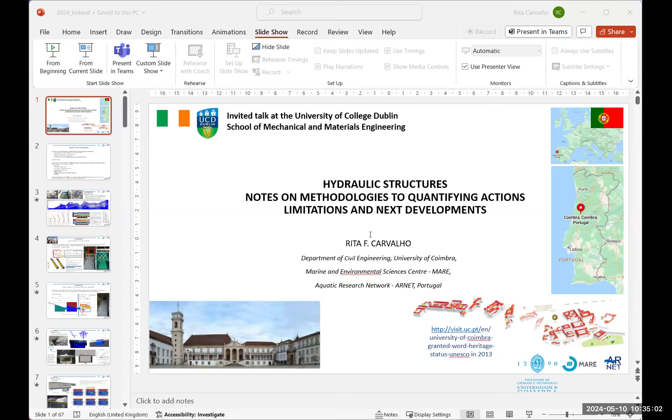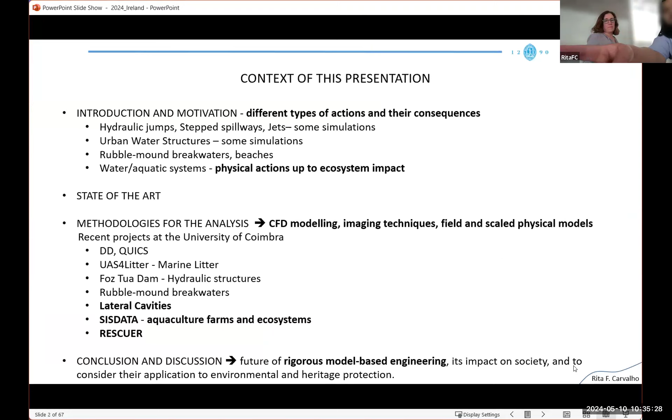Okay, so I will not do a standard presentation with introduction, state of the art, methodology and results, but I will give you... it's not moving on Zoom. The presentation is not moving on Zoom. I think we need to change the screen we are sharing. Yes, it comes now, but it's not in presentation mode. Okay, perhaps like this, probably. Change one slide. Yes, okay, and then we can put it to full screen. Perfect. Here, should be fine, this is perfect.

Okay, so I was saying I will give you a sense of what I've been doing since my PhD, more or less, and then I will mix a little bit of methodology with the projects I was involved in, just to justify the present projects and what we can do in the future.

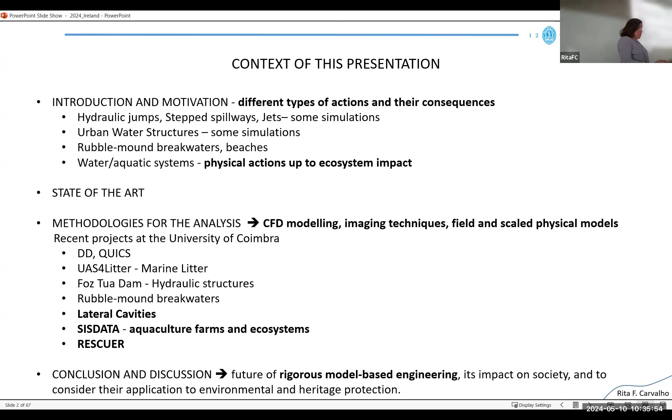So I start with hydraulic jump, which I think is the most interesting hydraulic phenomenon in the world. It's really important because it can have hydrodynamic pressure and cavitation at the bottom, and could even move slabs, very wide ones, at the bottom of the stilling basins.

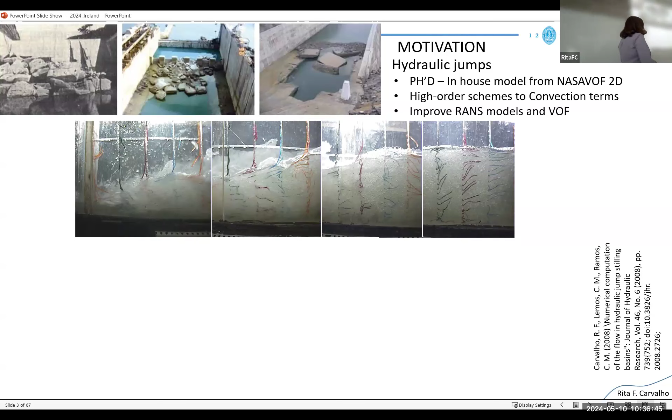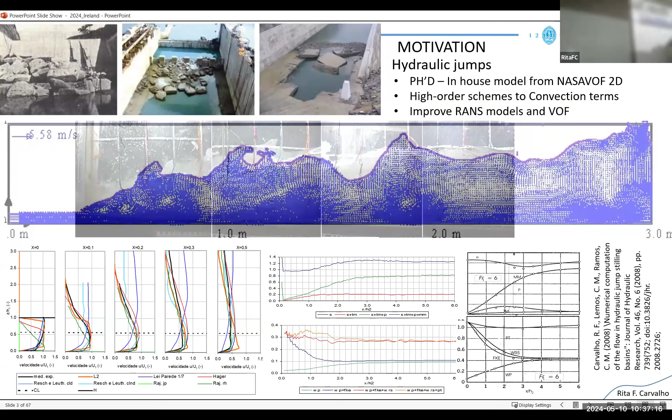So I started doing numerical simulation of hydraulic jump, also with experimental physics. At that time I used NASA VOF 2D, which was public from Los Alamos. I had to model all the high order schemes for velocity, and I could model the hydraulic jump in an apparently realistic way. But when I compared the results with the literature, and did some calculations along the hydraulic jump, the velocity wasn't very accurate, because we still had a lot of high velocity at the bottom, and also we didn't have the energy dissipation we were expecting in the models.

I also used this model for stepped spillways, but then Pedro, who was one of my first PhD students, wanted to go further in solving the hydraulic jump, and he tried to include a subgrid model for air entrainment in the stepped spillway. He noted that for narrow spillways we have like a 2D model, but when we enlarge the width, we have cross vortices along the width.

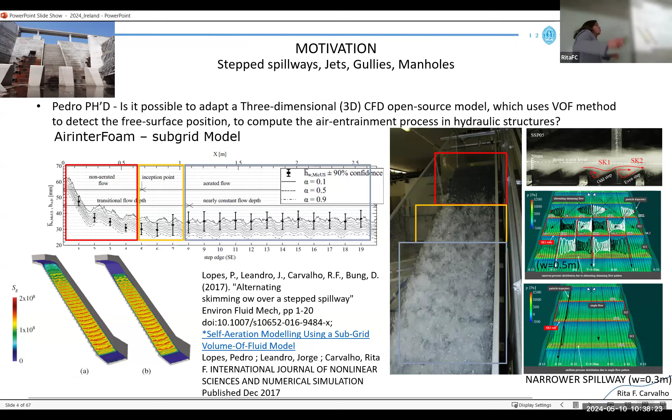With the air entrainment model implemented in OpenFOAM, AirinterFoam, we could get better results for the water depth, which is one of the important things to analyze for the walls of hydraulic structures.

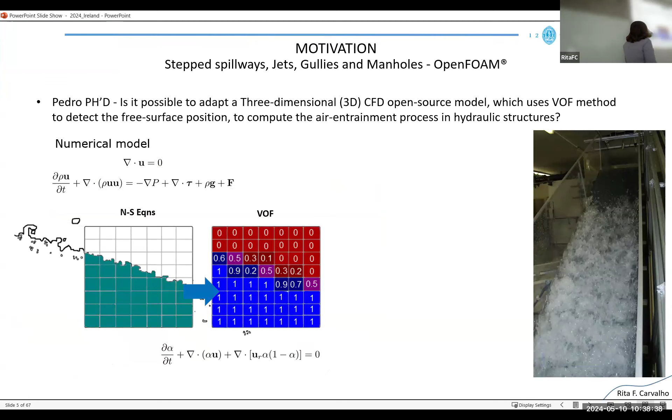So the model starts with the VOF model, and then we can analyze where the interface is with the VOF function. To include the subgrid model, we select just the interface, and then calculate a source term given by turbulence or velocity normal to the surface, and we could include some bubbles inside the model. We can couple it one-way or two-way, with some interaction between air and the model.

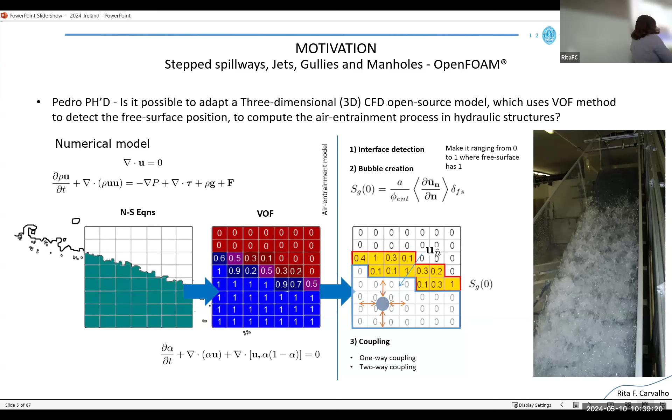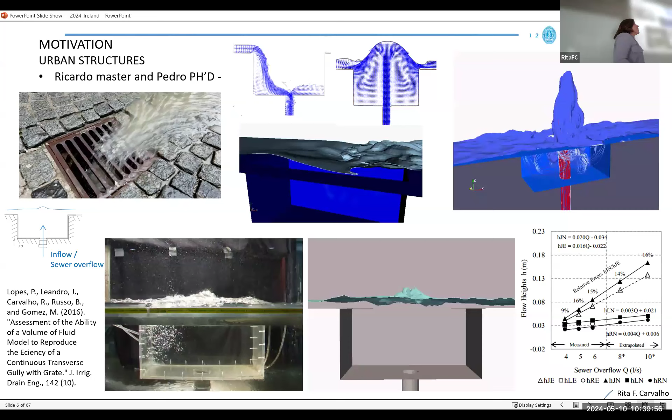We did some simulation in the gully. At that time it was much easier to get funding for urban structures, so we dedicated work to the gullies, and we could get some depth and some insight in the model. We also have something like a geyser effect when there's a lot of flow there.

As you noted, we didn't have bubbles inside initially, so we used interFoam to analyze the role of the bubbles inside, and we got good results as well in the gully.

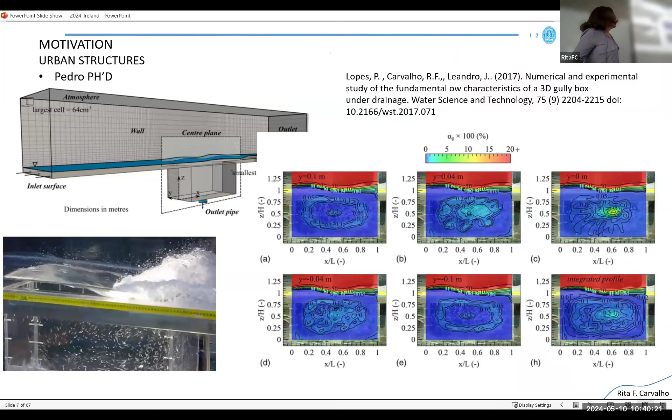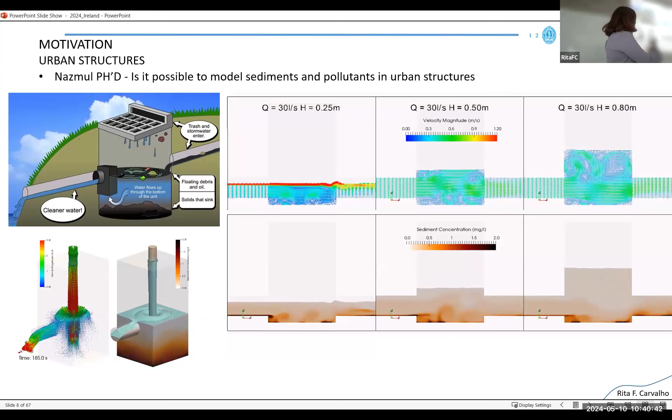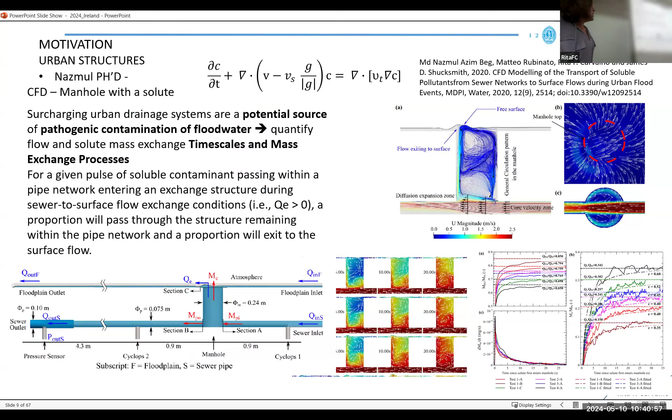Then we started to include sediments, like just a transport equation, and used some literature models to calculate the sediments in the manhole with the velocities at different water depths. We had to analyze some pollutants passing through the surface in the streets and also in the manhole, and we got quite good results.

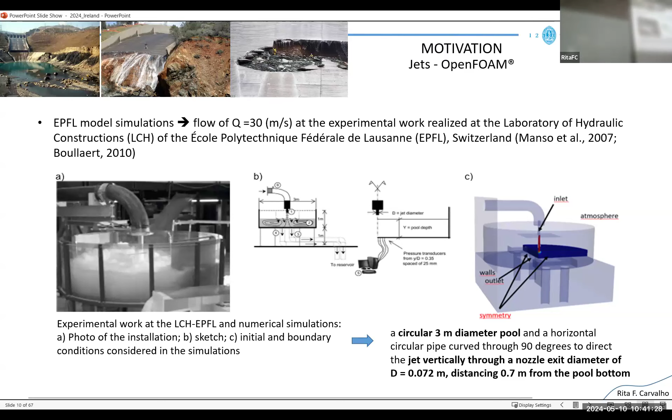So with the quarter we have a symmetry condition, so we use both subgrid model and multiphaseEulerFoam. Okay, this is just velocity. With this we distinguish here the water and the air. Most part of this velocity belongs to the air and not the water.

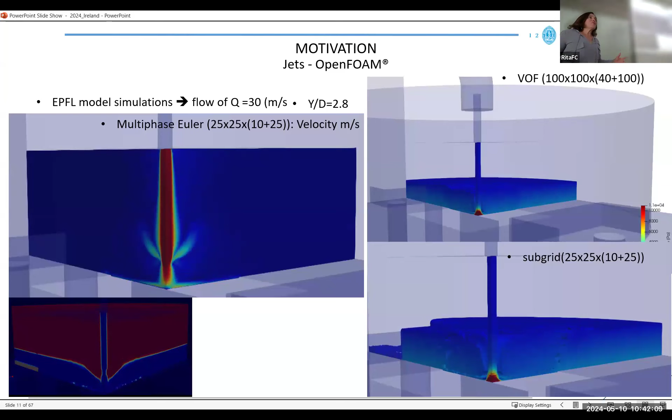multiphaseEulerFoam is taking too long to be solved, but it seems more realistic. But in the end, as we need too much time to have average and to have water depth, we can use VOF or subgrid that takes into account some air.

We analyze the steady state and we compare different models for the pressure on the bottom. We got good results from the fluctuation because we had turbulent kinetic energy according with the fluctuation, which is according to us. So turbulent kinetic energy is 16, so the square root is 4 meters per second, and it is according with the experimental in EPFL.

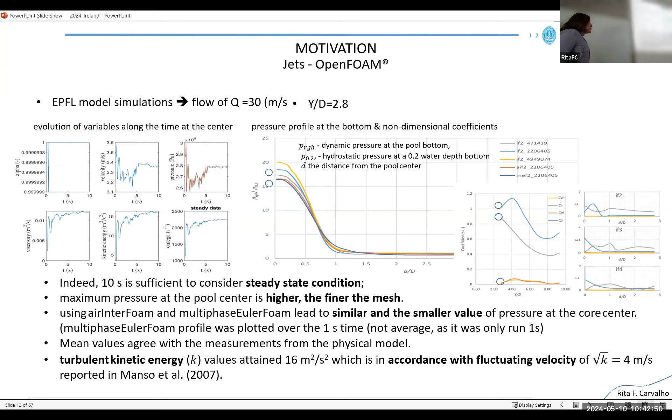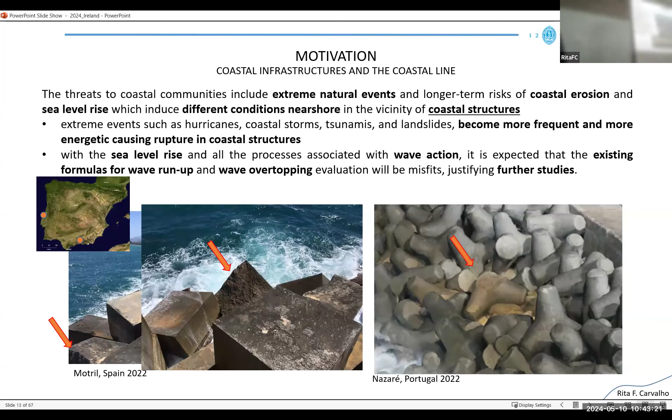Now we are analyzing with drones the port of Sines, and we see there are some movements in the blocks, and we could compare these figures to characterize the movements in the blocks, and then we can use also to validate some models.

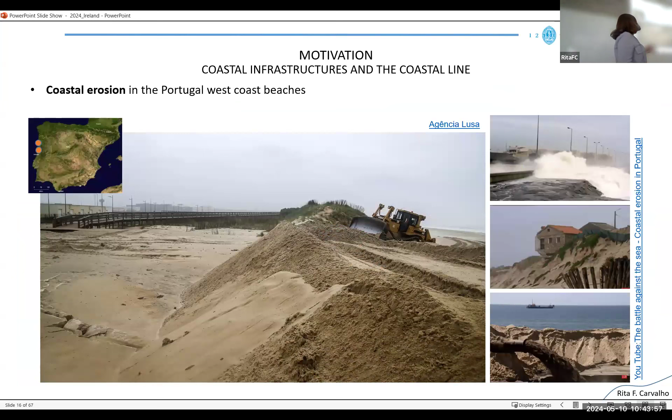We have a research center in Figueira da Foz, that is Mare Foz, and we can also have access to this breakwater. Of course, I'm worried also about the sediment, the erosion near the beaches, mainly in Figueira, that we have a problem that we have more accretion here and erosion here.

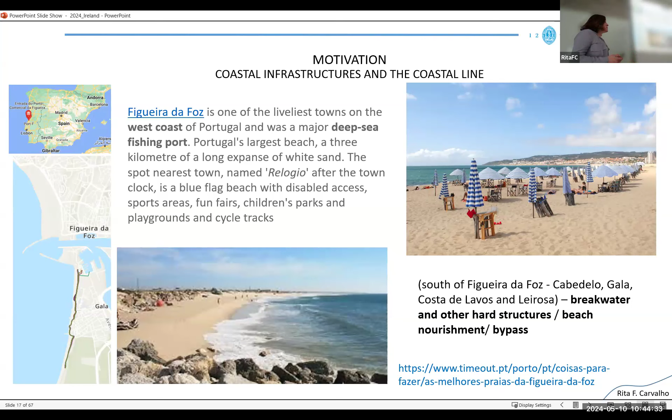And the prediction are to have these lines, and we are testing like some low sediment flow from this part, north part to the south part, but it's very expensive, so we are looking what is the best solution.

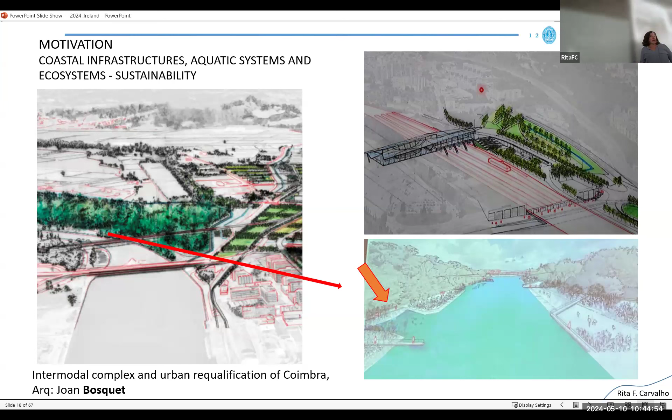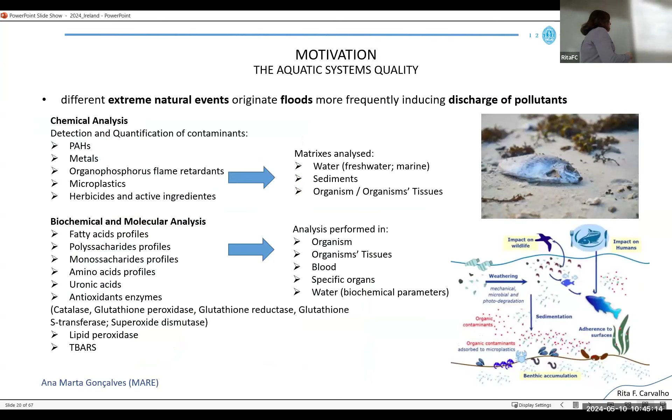And we work also in our research center with pollution and microplastics, and we see in Figueira that appears a lot of dust. And we also analyze a lot of things related with the aquatic system and the quality of the water.

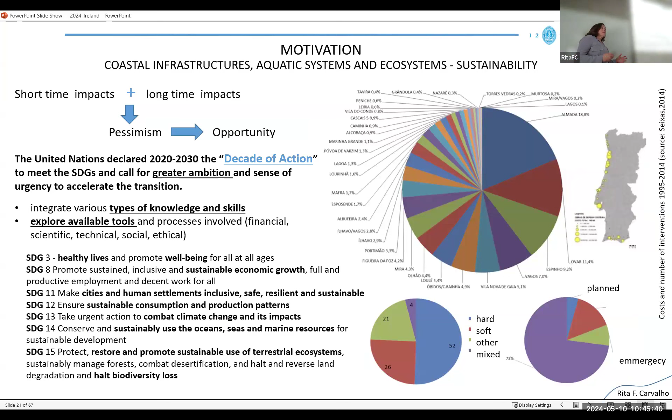So looking at the problems that hydraulics is involved in, we have a lot of problems, and we have to dedicate a lot of things related with the water. So my motivation is more and more related with fluid mechanics, to understand how the flow behaves with different hydraulic structures.

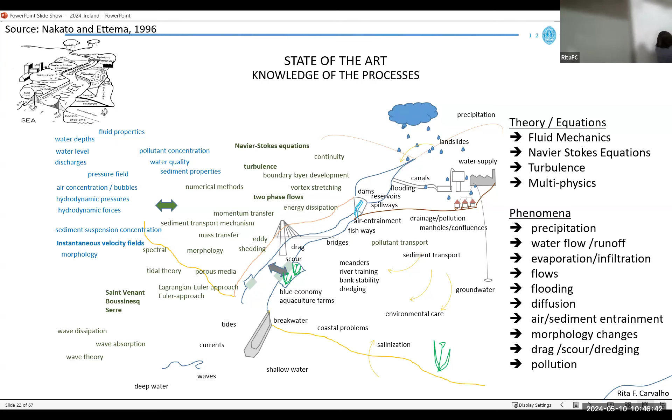This involves a lot of things, from rain to drainage to the urban part, some natural cavity, some interaction with vegetation, and so on. So I think that the picture tells that.

Focus on fluid mechanics, the water. If the velocity is great, when you have some geometry change, we have some movement in the water that creates some process.

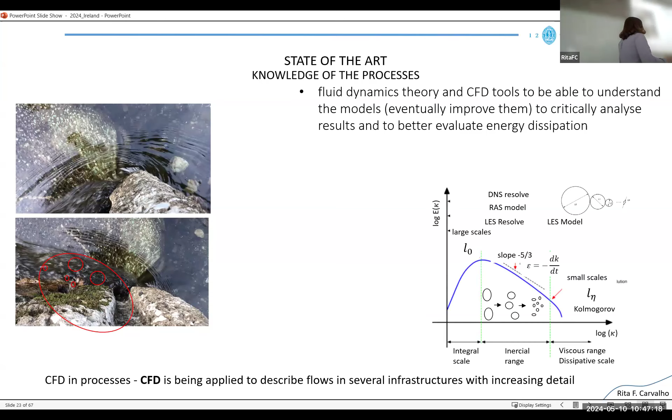We can understand turbulence nowadays with the energy cascade, that the energy is spreading from large scales to smaller and smaller, and have some dissipation.

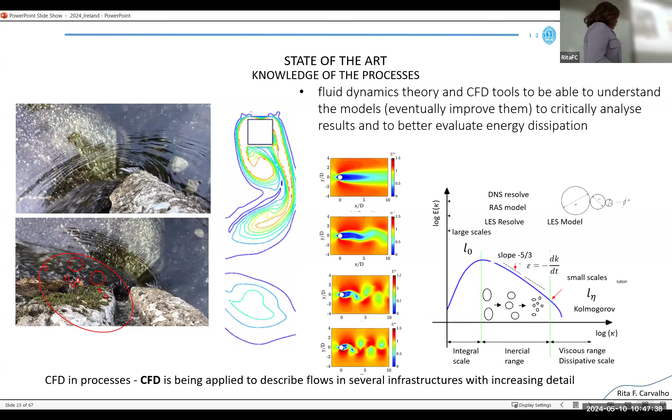And we also know that there are a lot of dynamics that are characterized by different Reynolds numbers, and we can now simulate and model and understand these particulars.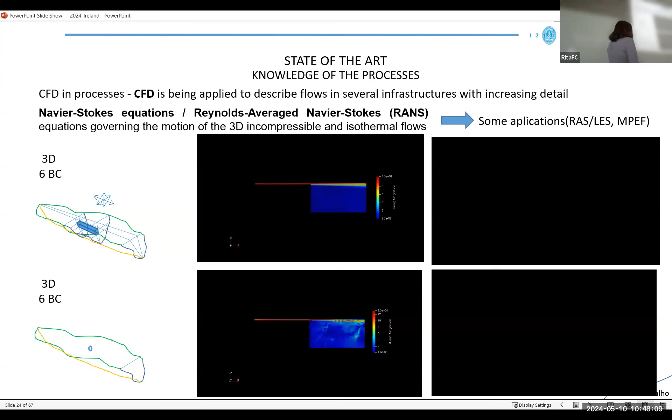The CFD we can apply with meshes thinner and thinner, and for this kind of mesh we can use large eddy simulation instead of RANS. Nowadays we see a lot of publications that say that it is large eddy simulation, but it is not real large eddy simulation, because for having large eddy simulation we need to have a very fine mesh.

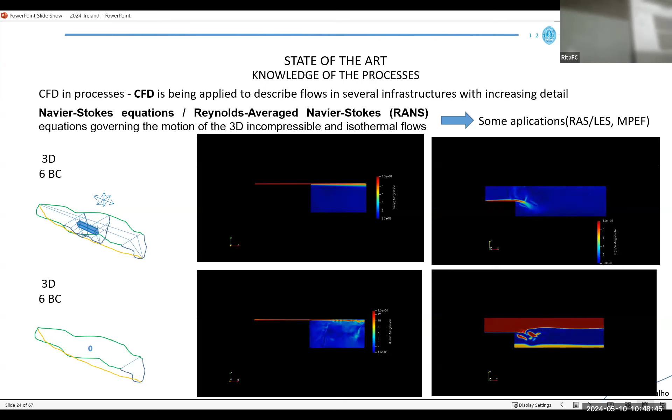Also we have multi-phase, that is the only model where we see some interaction with the air, and we can see this very easily when we have a wave break, that there is a spread in the air and in the flow. Okay, so here is the velocity, here is the different flow that I also include some sediment in the bottom to see some erosion.

So I'm motivated now to calculate the air entrainment and air-water interaction, and this is similar to waves and to jets.

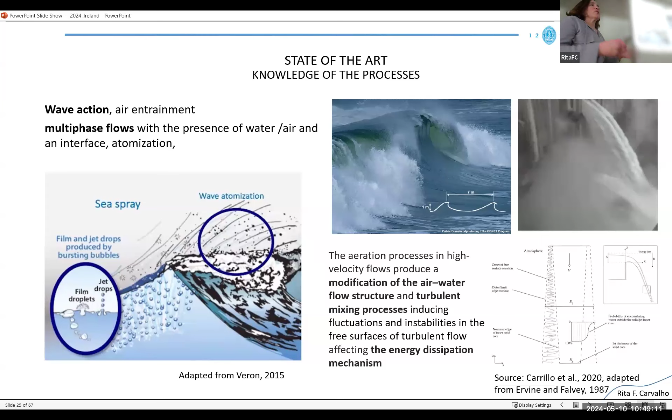We can identify from fluid dynamics the different types of air entrainment we have, and also the turbulence that could also provoke some structure movements, which is something I would like very much to study.

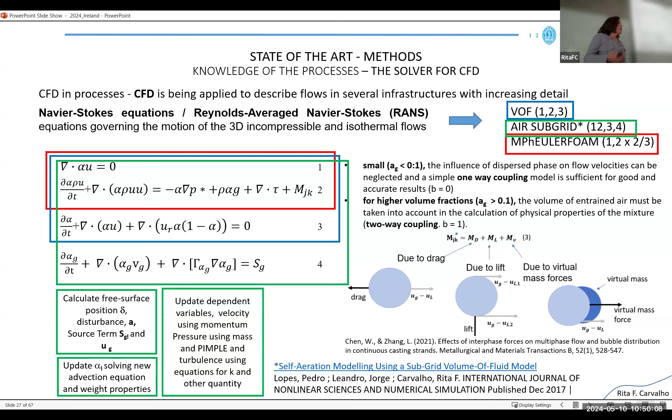About the air entrainment models, I presented the multi-phase EulerFoam, that is the Navier-Stokes equation for each flow. I also use the one-step Navier-Stokes for the whole fluid, like a mix between water and air, including just density and viscosity. We can also use the subgrid model, with an additional equation for the gas with a source term that could arise from excess turbulence or velocity normal to the surface.

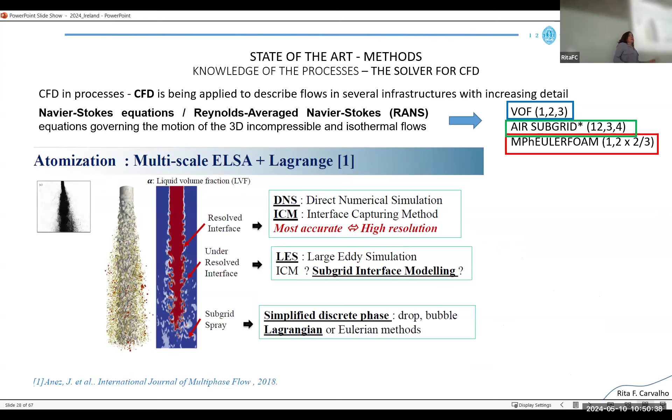There is also the ELSA model, which mixes with Lagrange, able to simulate some bubbles and interactions, some evaporation interaction between the water and air. So I'm moving now to Rouen, where they developed this model to analyze these kinds of problems. Let's move on to the methods, with some projects we did.

After finishing my PhD, we moved to a new lab, because now the university is divided between Polo 1, the old part, Polo 2, which is all engineers, and Polo 3, which is health science. And I had just the flow without energy.

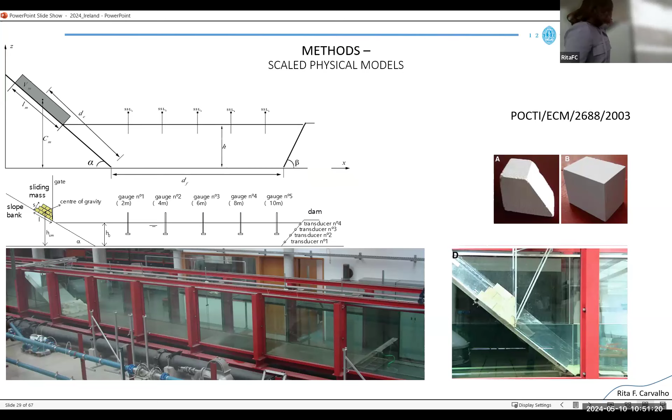So we took some models, some simulations about landslides. We didn't need any current, just water inside.

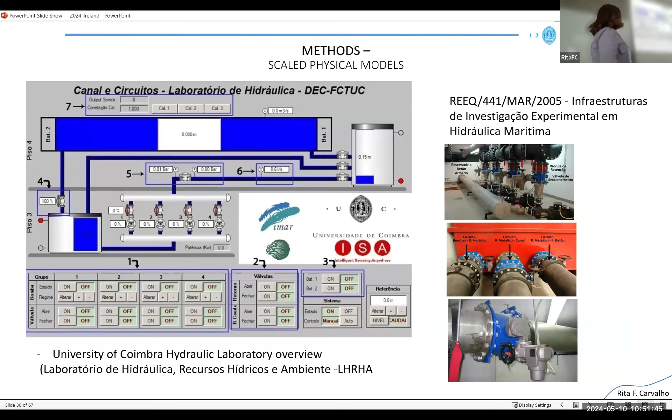Then we had a project to equip all of this, and I was in charge of doing a SCADA system, able to connect or switch on 2, 3, or 4 pumps, and control the flow between the reservoirs, the two reservoirs, and the channel.

We did a lot of tests, like some new equipment for producing energy, some hydraulic structures like channels with baffles, and we started to develop some image techniques.

This was in MATLAB. It was a master student who didn't like to study very much, but he liked photography and cameras a lot. So he did a Simulink setup doing video, and at the same time we could calculate the water depth instantaneously. It's kind of an easy task.

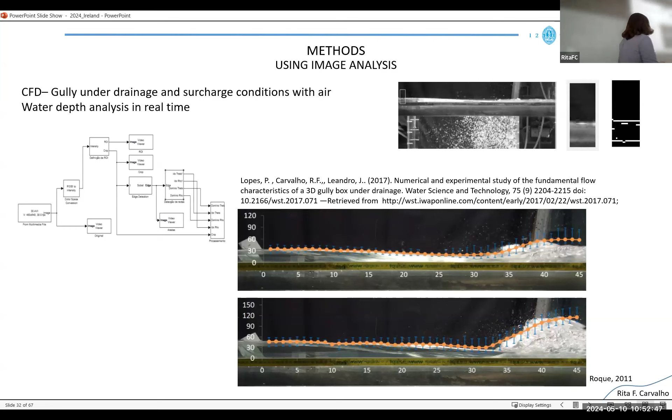We pass water and air, and then we can identify an edge, and then calculate the distance between two points. We improved this model recently with different bottoms in different channels, and also, motivated by imaging, we followed some techniques in MATLAB to analyze the movement of the blocks.

We collaborated with LNEC because they have large laboratories with big space for breakwaters, and we analyzed this with a simple technique like a matrix, subtracting each matrix. So we have a film, split it into several images, subtract each one, and then we can analyze where there are big slopes.

We detect the image before and after, and notice that one of these stones moves to here. So with this technique, we can localize in time, and then looking at the matrix, we can localize in space.

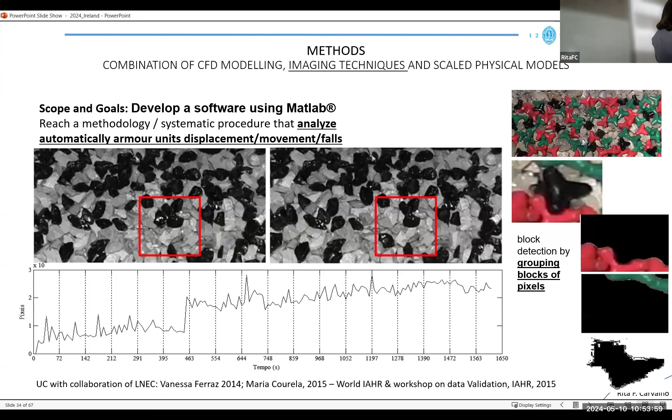Then if we want, we can spread different blocks with different colors, to have different groups and distinguish between them. We also can define the edges to better analyze the problem.

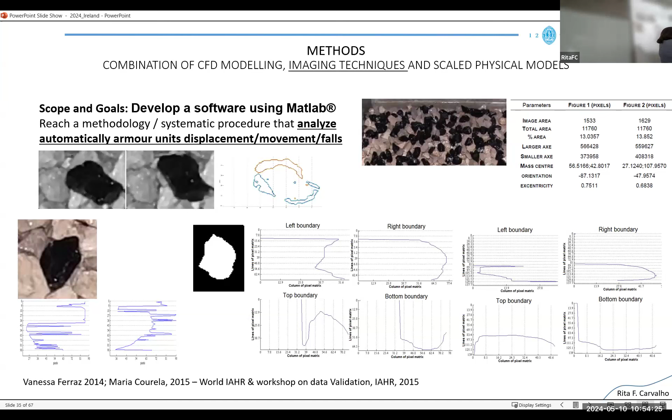We also detect some overall movement, because the stones were moving more or less together, but with some difference - we had a movement altogether with the blocks, so we could also analyze this.

For air entrainment, we also tried to find a relation between air and water. So we covered with black backgrounds, but then with water and air it was not very good. So we had to change this part to white to get the right relation between water and air.

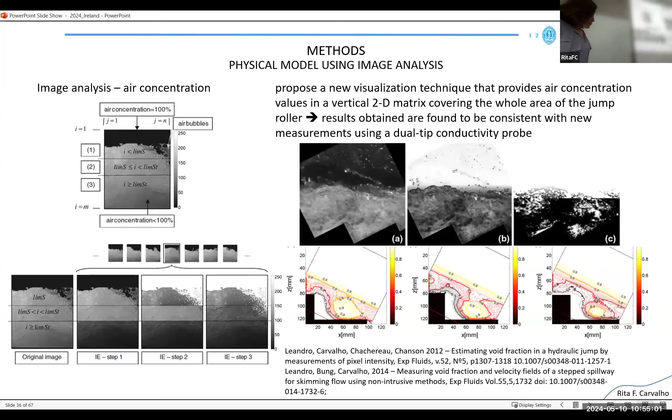We applied this to hydraulic jumps and to step spillways, and had some publications on that. And then with the project QUICS, we used PIV to compare with the CFD.

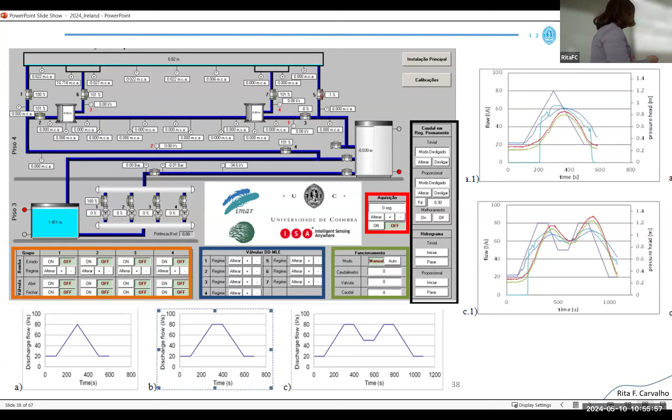With the projects related to urban structures, we could extend our installation to a dual drainage or multi-link model. We have a channel, a flume, with two gullies connected to two manholes, and we extend also the SCADA system. We developed some possibility to move the valves to have a water inflow, like a hydrograph, like a variable inlet in the installation.

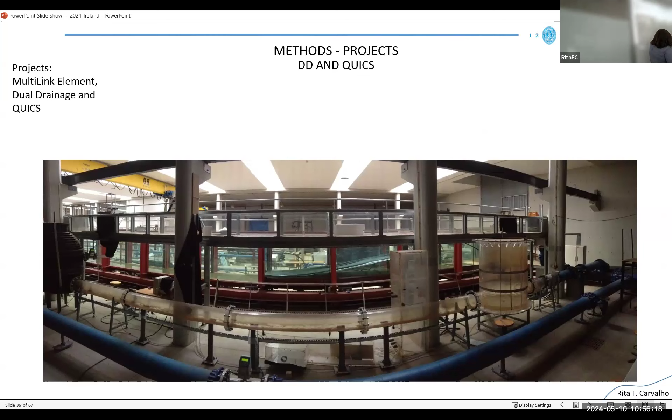So this is the installation. These are the manholes, which we made in acrylic to see the water inside, and we have that flume, and that's the pipe between manholes. We have a lot of pressure to analyze when we close the valve suddenly, and we can simulate this problem.

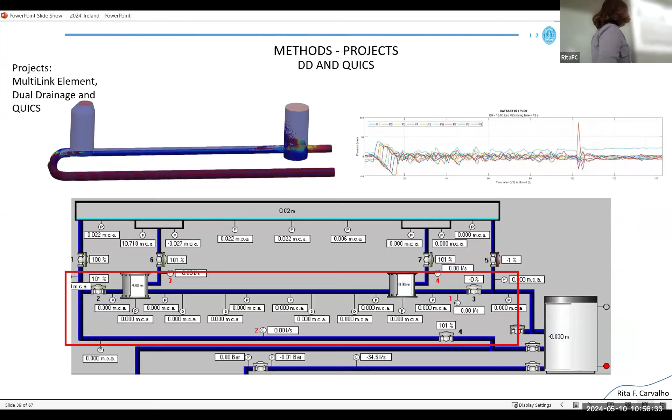The other project I was not involved in, but I was very interested in. It was to analyze with drones to identify different kinds of litter on the beach.

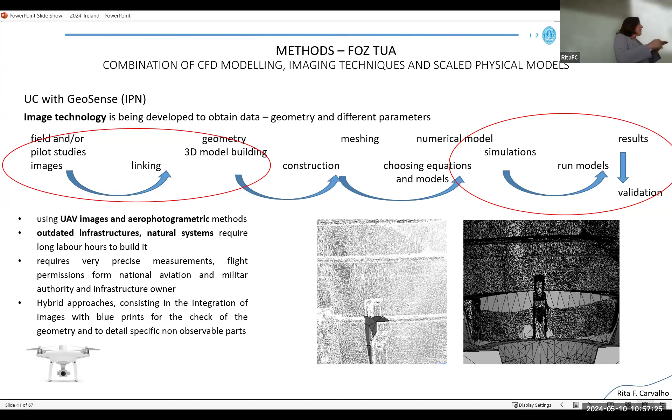This is the same technique we use also in hydraulic structures to have the correct geometry or to verify the geometry. With this project Foz Tua, we were allowed to measure in the stilling basin in the north of Portugal, but we didn't have the right geometry, so we used drones to calculate the surface. But the surface has a lot of irregularities and is not very good to use in numerical models because we have a very complex mesh.

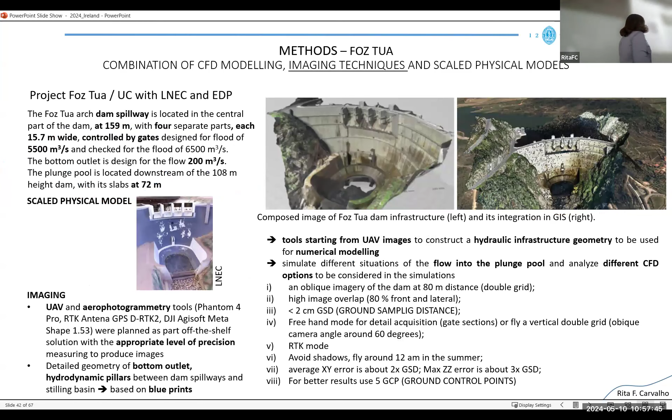But we have the scale model in LNEC with the drone. You see this is an image. We see here a reflection in the bottom, and we can place the models in GIS.

The project includes the placement of velocity transducers and pressure transducers. So we constructed some boxes in inox to include a new velocity sensor that is able to calculate the velocity near the bottom.

In the end, we just placed the box and we didn't know where was the reference. So with the jets, we knew and we could have the velocity, because the problem is when we have the jets inside the pool, we have a lot of vortices and we never know what happens.

So the structural engineer just puts concrete for the dam to be safe. But with the drones and with doing blueprints with the image, we could have a structure that we could use for the scale laboratory, and we could use for OpenFOAM.

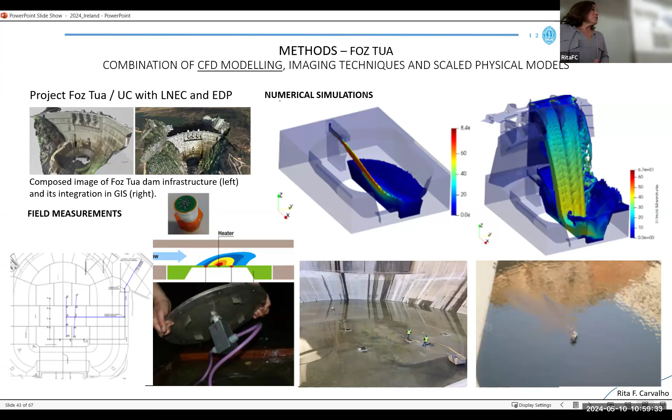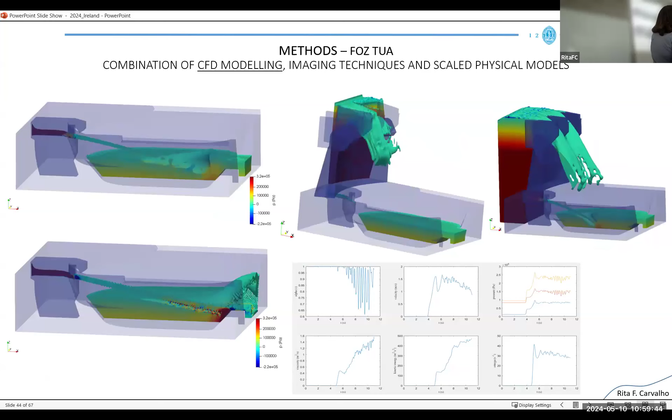We can have different images like the bottom outlet or the spillway over the dam, and we can have access to the pressure at the bottom and the instabilities, fluctuations, and so on.

With the drones, we tried also to do some inspection periodically in breakwaters in Portugal. We have some in Nazaré, some in Figueira, and since we will have frequent inspections.

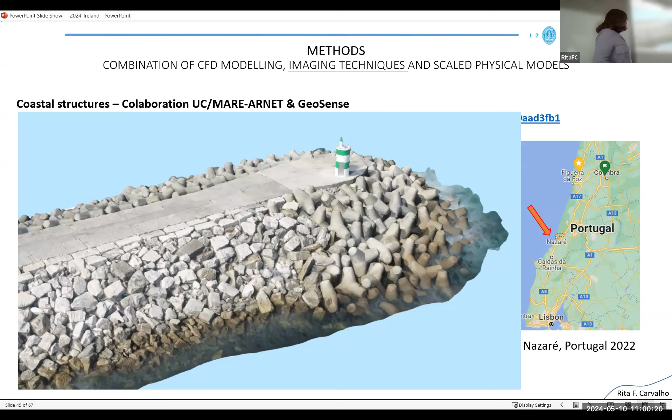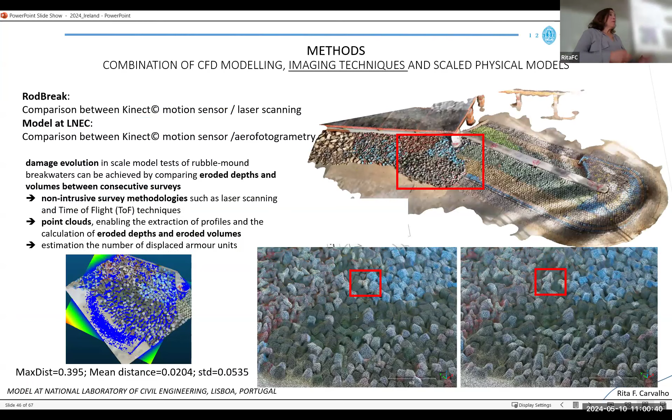Here in Nazaré it's a mix of tetrapods with stones. We have others that are different, and we can use image techniques to detect movement in the lab. So if we can use it in the lab, we can apply the same technology for the real breakwaters. I already prepared some proposals, but it's not very easy to get funded for this.

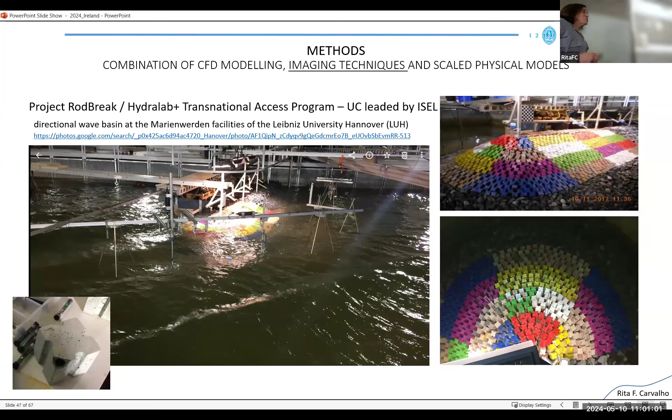Other project we were involved in was placing what we call smart stones, which have a gyroscope in the stone in the breakwater, and we analyze different images to see if it fits with the movement of the blocks.

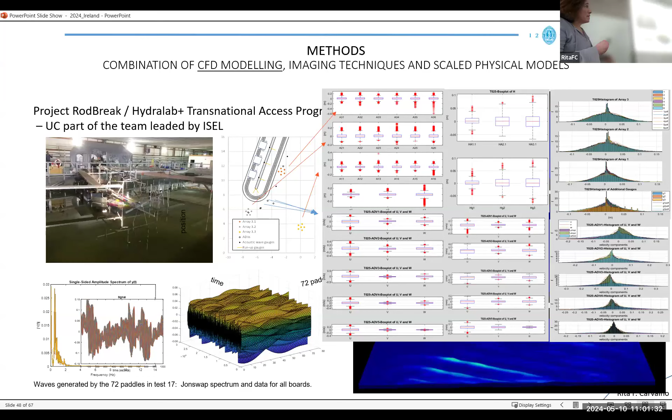I also tried this because there is a very large wave basin in Hanover with 72 paddles, and with the spectrum we could have an inlet, translating the movement that they had in the wave basin, we could reproduce waves in different directions. And then we can analyze to see the statistics and so on.

Recently, a master student disappeared after doing all the work, so we just need him to write it up.

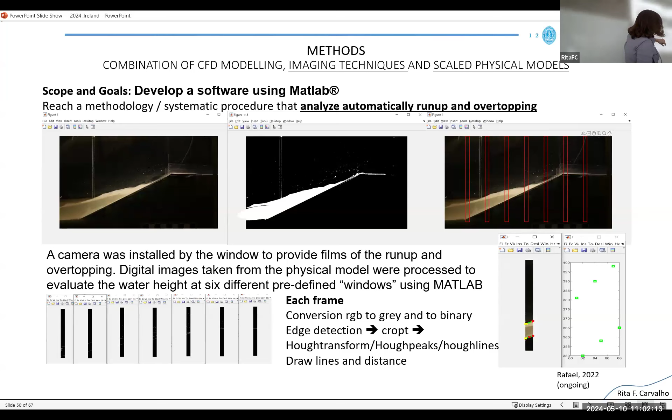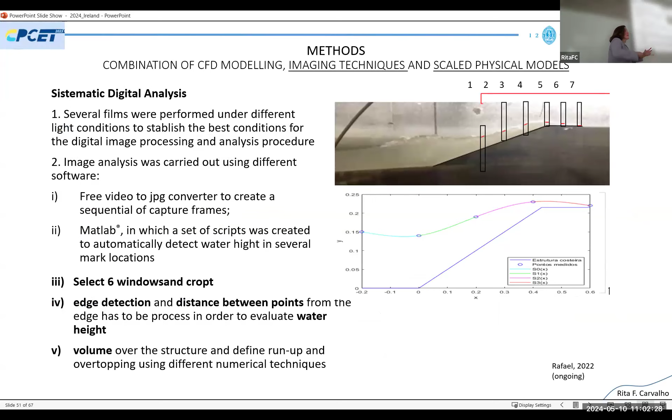We analyze the overtopping and the run-up in the structures in LNEC. We use image analysis, doing some work on the image to have more contrast, and then we can include a frame to see the distance from one point to another. If we have several windows, we can have different heights at different times, so with a spline we can get the run-up and calculate the volume.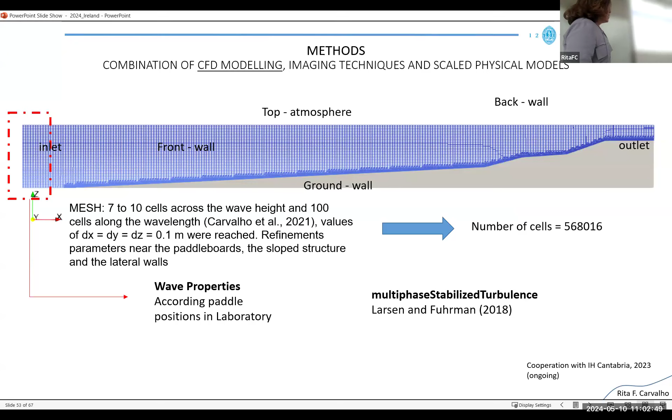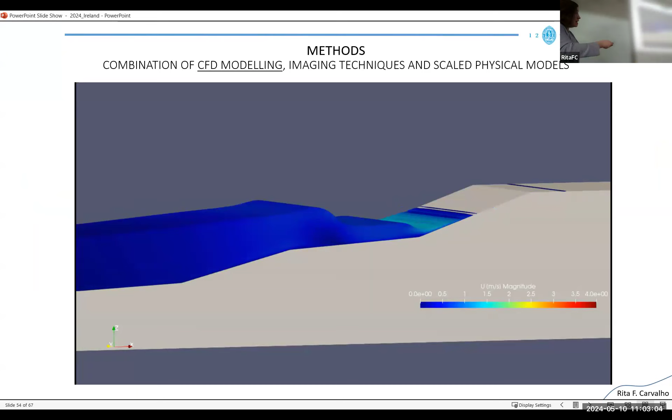That was the idea. So here we have a look at what happened with the run-up and overflow, and we try to do this with OpenFOAM using an appropriate turbulence model. This geometry is like this because we need the whole model, so the scale is distorted.

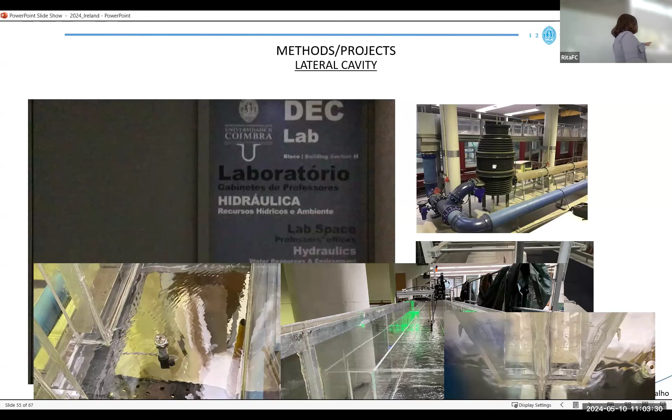In our lab in Coimbra, we have the dual drainage model. We have a lot of flumes with sediments, and we use our dual drainage model to place some cavities here to analyze the different dispersion. We tried to use low-cost laser, but it's still not working. You cannot see because we don't have enough illumination, so the seeding is not very well known, but it was just to see if we could have a large area simulation.

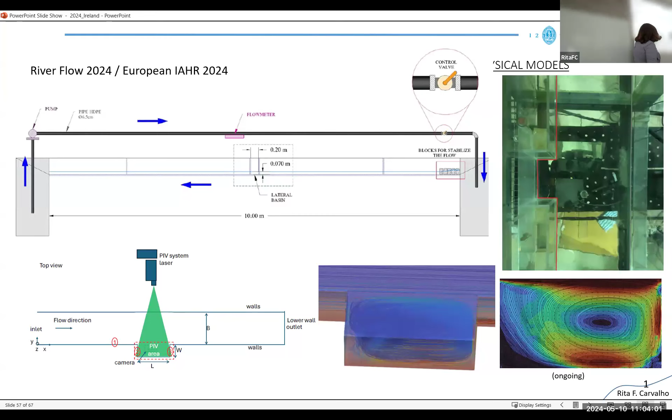Now we have a commercial PIV, and we are doing this work to analyze the vortices inside the cavity. It depends on the dimension and on the velocity.

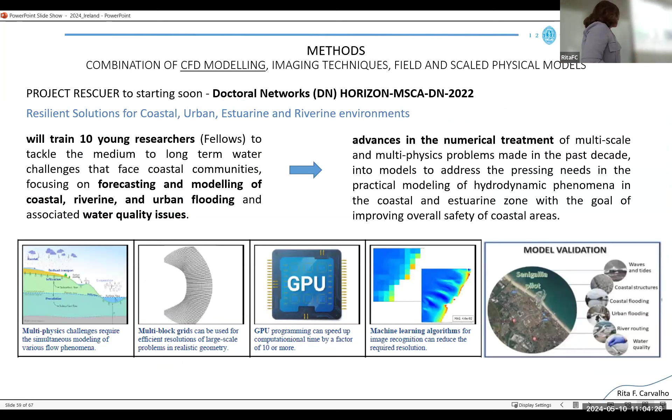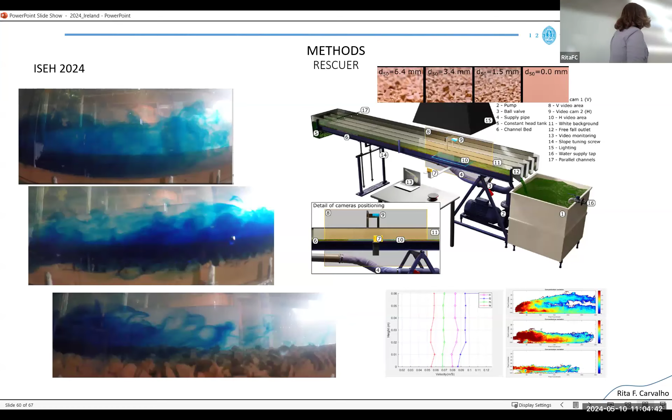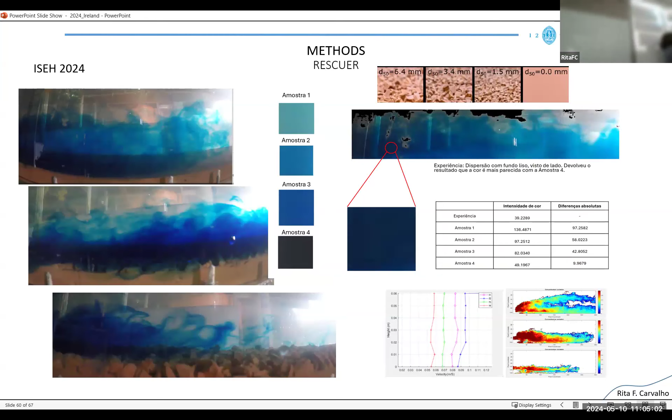For RESCUER, we also use a depth channel to analyze different dispersion on different rough beds. When we have rough beds, we have less spread. For this, we validate some images with different concentrations, then compare each pixel with the examples, and now we can calculate the concentration.

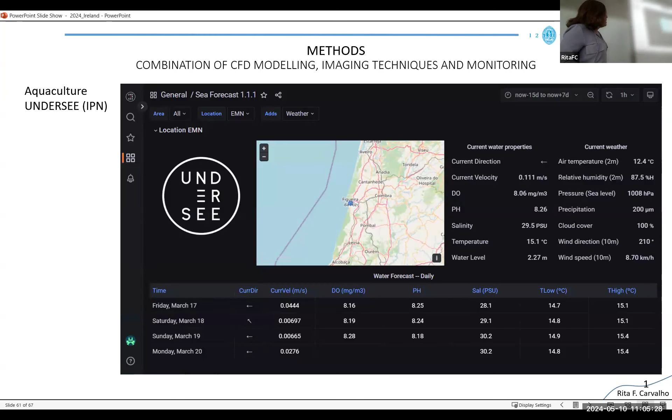The other project we are collaborating on with Dublin is UNDERSEE. We started with a platform to know the variables along the Atlantic, so we can focus on important places. Here the platform is looking at Figueira da Foz, where we have some aquaculture, more or less at the mouth of the Mondego, the river that passes through Coimbra and ends in Figueira da Foz.

There are a lot of tanks with sea bass developing, and we have to analyze the performance of the aerators to see if we are losing a lot of energy or money, and whether we don't need so much oxygen. But the producer prefers to spend money on energy than on fish, because the losses are huge. So the proposal is to contribute to better monitoring of aquaculture farms and optimize energy problems with air, and calculate the mass.

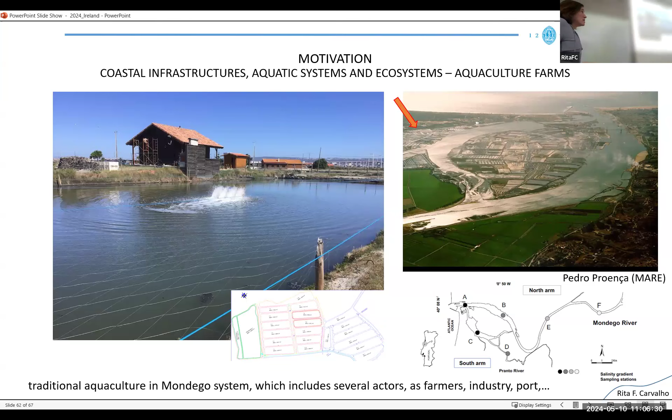We are still at the beginning; the project starts now. For this, I also used images to construct the paddle, because I contacted the producer in Taiwan and there were no drawings, so we tried to develop one. With images we don't have a very good result, but even so, with the paddle we could construct something new, and it's better to have the dimensions, so it helps.

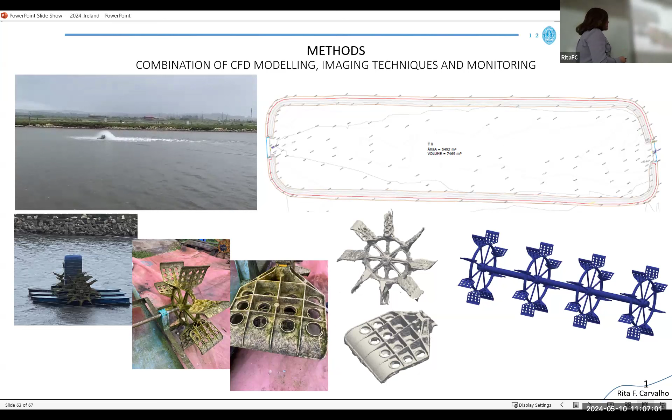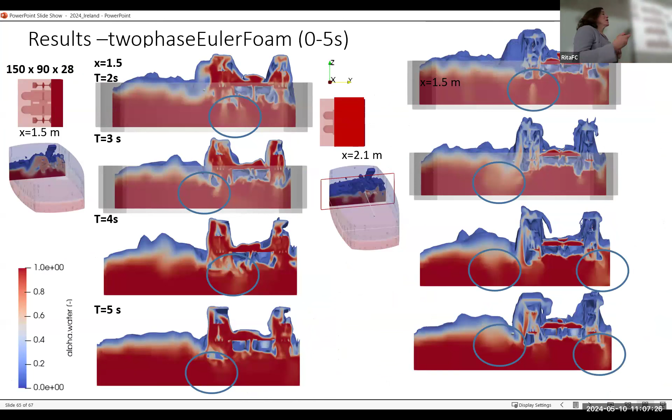So we have a kind of movement here, and we did a simulation with different velocities and different meshes, with a paper published to see if it works. Now we are analyzing the results of air inside the water to calculate the dissolved oxygen and relate it with the food spreading and so on.

To conclude, I think I see all of this always as civil engineering helping people and the environment to be resilient to new actions. So I think we must continue to monitor and do image analysis, because it's easy, and we know what we can get from the image.

Of course, we have to develop a lot of tools to analyze the data and the images, to get the most we can from the data. I took a diagram from the United States: they think they can have a computational tool that connects computational fluid dynamics with fish behavior, giving an idea also for aquaculture.

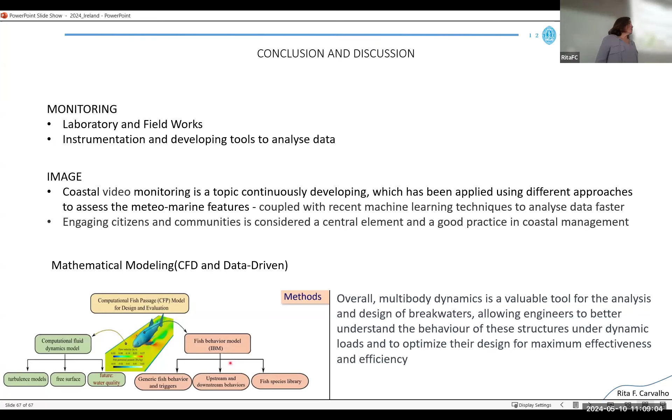I'm now focused on developing my abilities to model air entrainment better. And I would like, in the future, to go through multi-body dynamics to know how the blocks move, and how we can help coastal engineers be resilient to climate change. Okay, thank you.